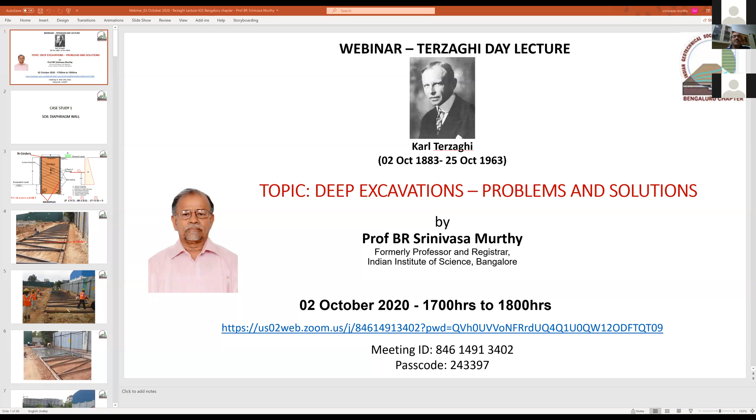Professor B.R. Srinivas Murthy graduated in civil engineering from Mysore, and then he obtained his master's degree in soil mechanics from IIT Bombay in 1968. For a short period, he was an SRF under a CSIR scheme at IIT Delhi. Then he served as lecturer in civil engineering at SIT Tumkur during 1969-70. Then he joined PWD as junior engineer and served 2.5 years designing major irrigation project structures. He spent a short period of 8 months as assistant design engineer with MECON in Bhilai, designing steel plant structures.

His passion for teaching brought him back to academics and he joined University Visvesvaraya College of Engineering of Bangalore University as lecturer in 1973, then became reader in 1981. He obtained his PhD from Indian Institute of Science, Bangalore in 1983, for which his thesis was awarded the Professor G.A. Leonards Award of IGS and the Professor P.S. Narayana Medal of IISc. In 1984, he joined Indian Institute of Science, Bangalore, and became professor in 1998.

He served as registrar of Indian Institute of Science for 3 years, and he superannuated from Indian Institute of Science in 2005. In over 2 decades of his service as professor at Indian Institute of Science, he guided 14 PhDs and 7 MSc engineering theses, in addition to scores of ME dissertations. I am also one of his MSc engineering students guided by him. He has published over 100 technical papers in international journals and conferences. He has also co-authored a book titled Analysis and Prediction of Soil Behavior with Professor T.S. Nagaraj and Dr. A. Vatsala.

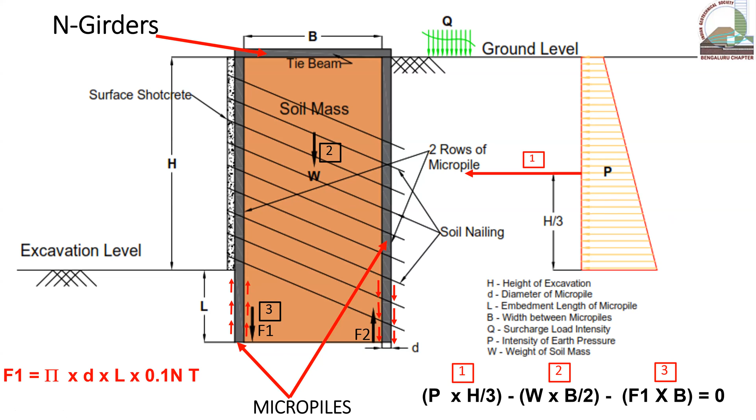Now I'll give you the details of that. Anybody can generate this mechanics-wise. There are 2 rows of micropiles, 1 row along this line and another row along this line. This is my excavation line, virtually the rear face of the retaining wall. Again, the retaining wall for 14 meters is not 500 thick or 600 thick. It's only 200 or 250 thick because earth pressure will not be there. I'll show you that later.

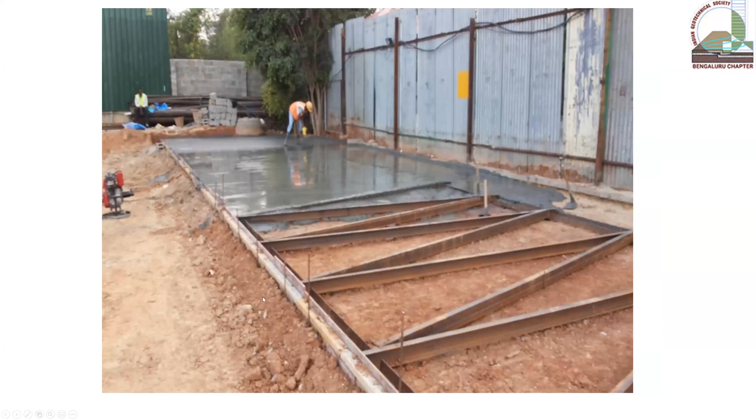So then you can see. And there is a capping beam here. What is this micropile? When I open it further, you'll know. Between these two, I introduce a girder so that the stability is ensured and the whole thing acts as a mass. Now I start working on this. We provide concrete on this, like this. About 200 mm thickness of concrete is laid all along this, so that even the construction vehicle can come on this. That's what we did here.

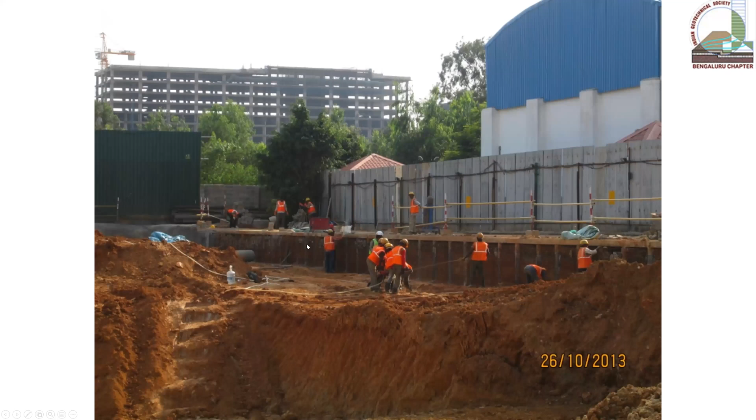You can see now. And then we go incremental excavation, not sudden excavation. Everything is done by incremental excavation. And then we drive the soil nails. For these soil nails, this is Honeywell property. It will not go beyond our barricade line here. So only about 4 meters or 4.5 meters was the available length. We drove that, you can see now. Once we drive that, we fasten weld mesh and then we put the shotcrete on that and continue the steps.

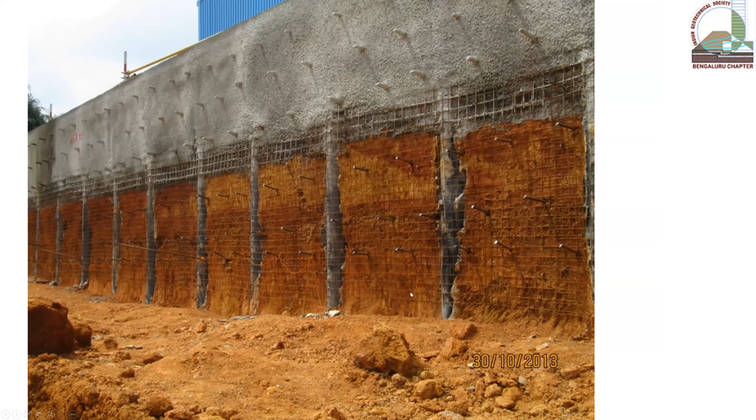But once I go up to a certain depth of 3.5 meters, I may have to provide additional stability for the micropiles. You can see them here. This we call snug fit and welding. This will be cut to the shape available here and then welded in between them.

You can notice one more thing here. The weld mesh shall never be welded to the micropile or to the nails. It shall be fastened. On the top of that, I have got a small MS strip, and that is welded to the micropile. Or I can have a crossbar. That crossbar is placed outside the weld mesh, and it is welded to the nails or to the micropile. That's how one has to do it.

And again, you can see the groove here. This groove has been cut here in the soil to embed the whaler beam, or whatever beam you want to call it, a lateral support. It's snug fit and welded. Snug fit means it is cut to the shape here, and it is welded from here when I am at that level. I can keep on going like this.

Then you can see this one. This is another one. Same project. Next, you can see together. This is the next level.

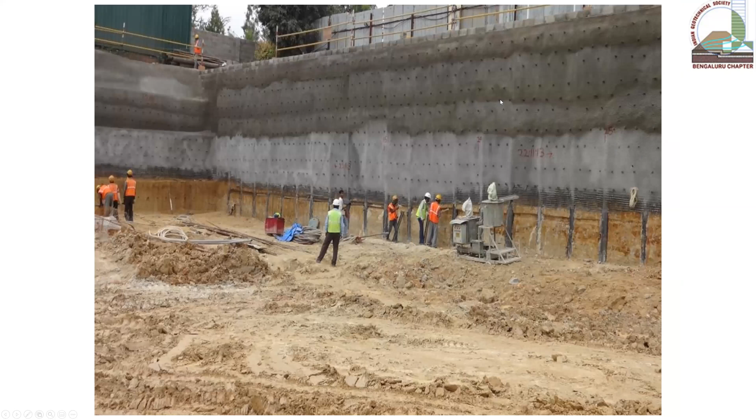So you can see the snug fit and welded whaler beams have been provided here, and this is coming here, maybe going to one more level. That is absolutely required to maintain the stability of the front line of the micropiles, whereas the rear side is already embedded fully, so there's no problem for us.

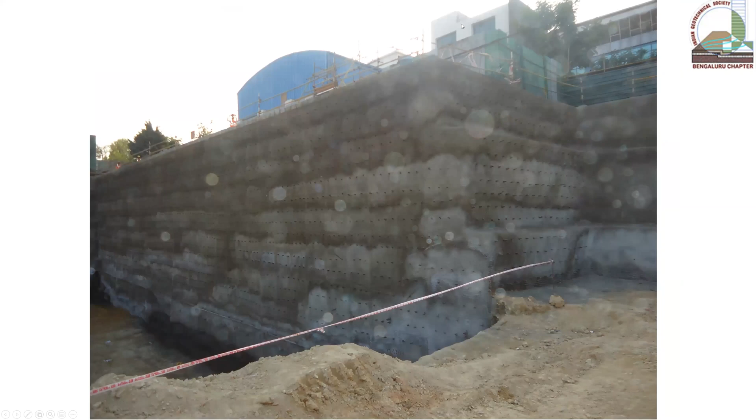And here again, we have done it in the cross direction. You can see now, this is how it comes here. We have gone up to the full depth here, you can see. This is standing on its own. Why should I design a retaining wall for earth pressure? There was a major difference of opinion with the structural engineers who are supporting RMZ and L&W. Then they came back and said, yes, sir, we agree. That is the reason why the wall here is not a retaining wall, it's a basement wall. It doesn't retain anything because this is standing on its own.

And when we cannot drive the bar, this is the point. Driven bars have got a limitation that they can take more time to drive. Then I go for one row of grouted nails or two rows of grouted nails depending on the situation. Here the total depth was 14 meters. We introduced grouted nails here, 2 rows.

These grouted nails have one problem: I have got this whaler beam projected out. It will be embedded inside the concrete. That is the reason why we went for another 50 mm extra thickness up to here, and beyond that, above that, it's only 200 mm thickness. So that is a beautiful work.

In fact, our Basavaraj from the structural engineering group said, sir, you have converted the soil into a structural element. It is something different. Yes, I agree with it. Together it's working. Even in Nepal we are doing it, in Sri Lanka we did, many places we have done that. I hope that you can.

In fact, one gentleman asked me, sir, have you patented this? Sorry, I will not patent anything because my institute founder, Jamshedji Tata, has written a will that the research outcome from this institute shall be in the public domain. That is the reason why I have not patented anything, though I had many chances to make patents. I will not be doing that. Thank you very much for that.

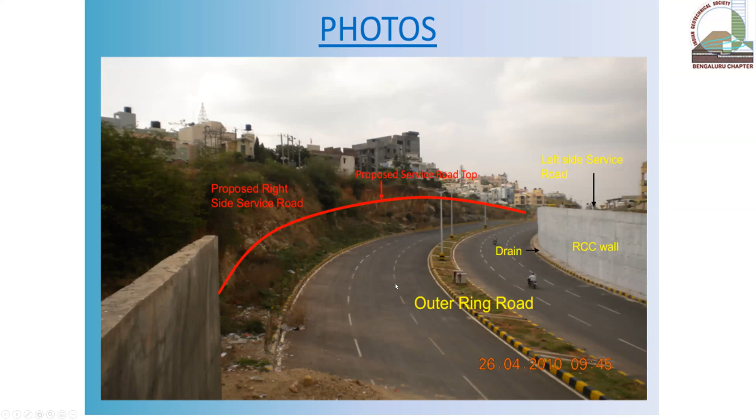Then what is the space available? Sir, there are a lot of multi-story buildings above here, they started telling. So I went around. Then what we did, you can see here. This is again in 2012, I signed this. That was 2010 end, this is 2012. After 1.5 years of discussion, in the existing ground, I put the grouted nails.

And for tension here, we may use steel, but they preferred precast elements so that it looks elegant. They didn't want a blank wall. Therefore, we went for the RE wall panels here. And these RE wall panels are interconnected to these grouted nails with the TerraLink. TerraLink is a polypropylene material which can take enough tension. You can see that.

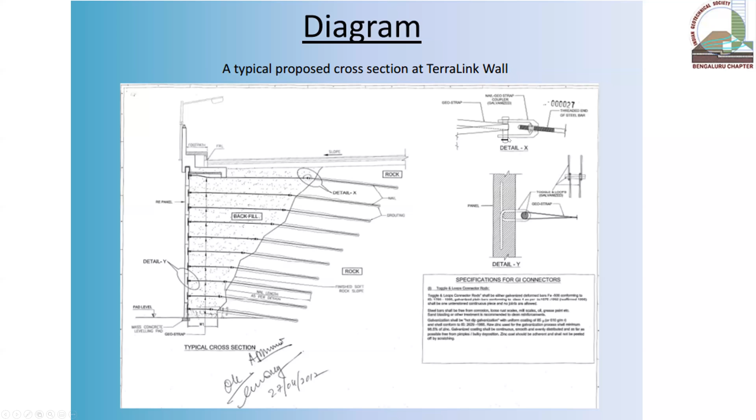So layer by layer, we can do this. Fortunately, TerraLink is available with different strengths, right from 4 tons, 6 tons, 8 tons, like that, the tensile capacity of that. So we can have capacity here based on the number of layers we put here. And in fact, this is a turnbuckle system, where for the rod here I have made this turning, and then this link here; you can see it more clearly in the photos.

And this is how drilling is done. It is not that everywhere I am getting rock. You may get soil somewhere there. And again, the link. You can see the drilling, how difficult it is. You can see the building, how close it is. We have got hardly about 9 meters above to make the road.

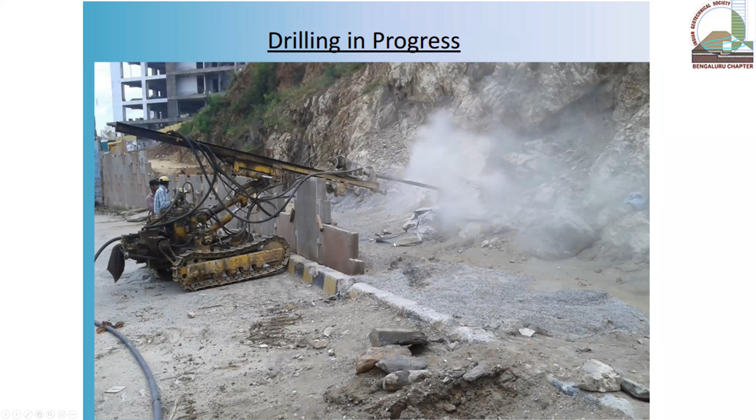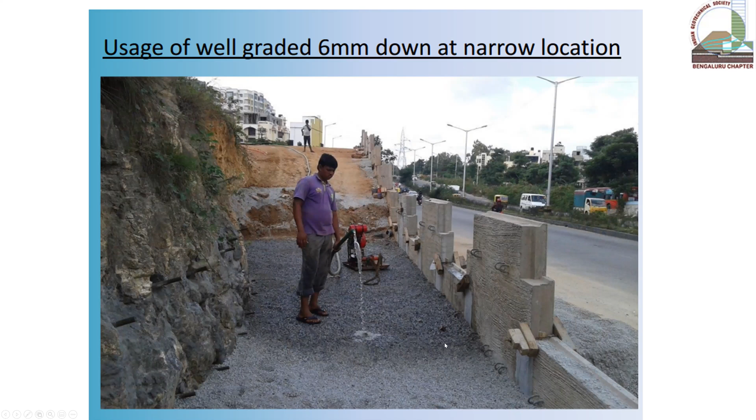So then we use the precast slabs here. You can see here, RE panels. These RE panels have been brought here with a small foundation, and then backfilling with a proper material. For this, we prefer it risk-free. It shall be self-draining, everything like that. That's why we went for a granular material.

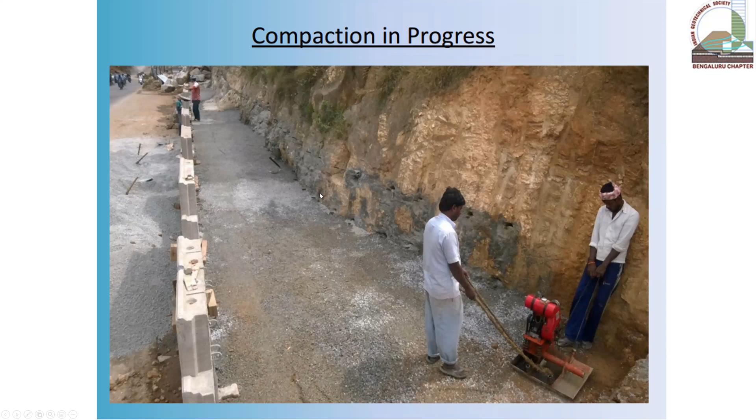Okay, you can see now how it's compacted. You can see before that itself we have drilled here. These are all grouted nails. At this level we do this, and then when I go up to here, then again do it. You can see the nail layer.

Then how we link this, you can see here. This is what I said, the bar from inside has got a threaded system. I get a turnbuckle here, and I take the Terra tape here, round this, and can you believe that this can come even to 100 meters length, 160 meters length. We go by this and wind it here like this.

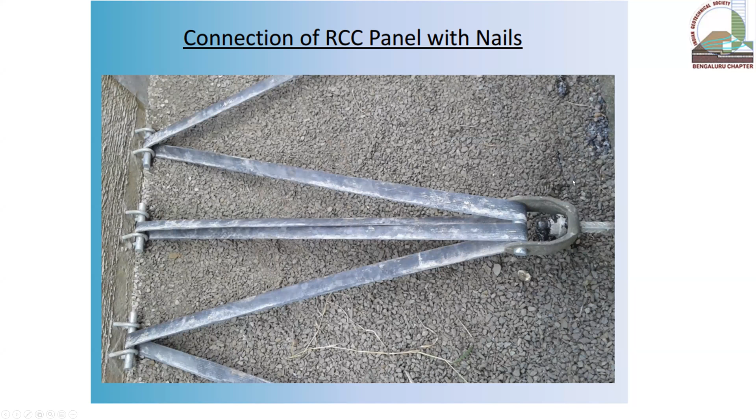And this is the precast element. On the back of that, we have introduced a rebar. This is a galvanized bar, so that it doesn't corrode. And these are the hooks which have been embedded into that, and then it holds it. You can see now, this is the panel. At each level, we are doing that. You can see. Going. Again, layering above.

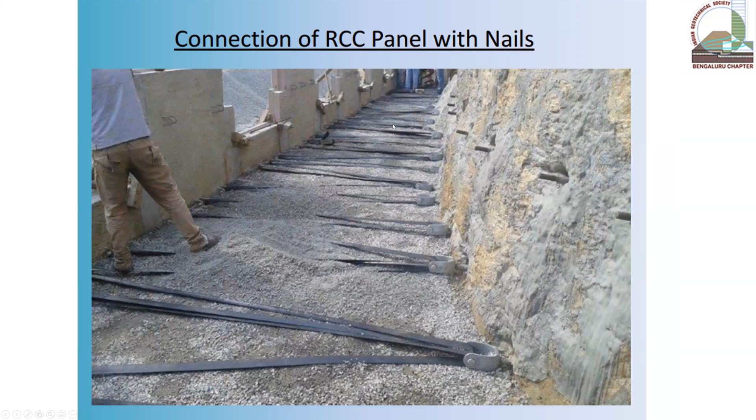One more view of that. Another view. You can see how bad it is. There you see a hard rock. Here you may see soft rock. You may see something very bad also.

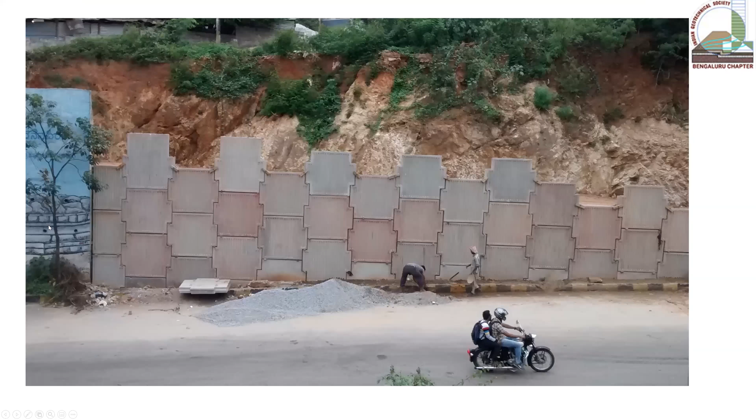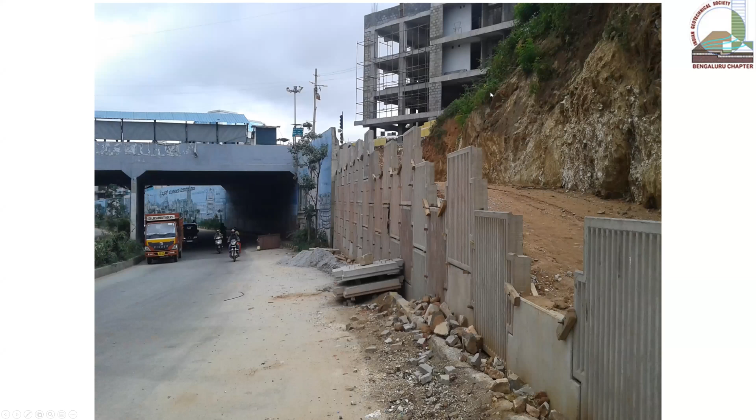And this is how you can see the panel is interconnected with the return wall of the underpass on that side. This is the underpass which is coming from the outer ring road, and next to that we are building it. And above this, you can see the buildings which have come up there. You can see the panels are sitting. You can see now much more.

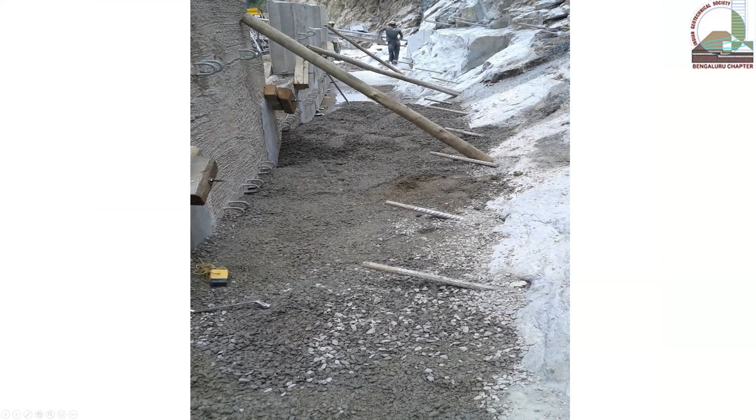And more additional drilling. These are all additional photos showing how bad the site situation is, everywhere. It is about 600 meters length, not 1 or 2 meters. And when we do this, we may find many problems, hard rock here, maybe soft here, something else here. We should be ready for all that.

If I find it soft, for example, if the drilling time taken is 3 minutes per meter, I may use one parameter. If it takes 8 minutes per meter, I may use another parameter for the friction. If it takes 20 minutes per meter, then I may use something else. This is why field engineering is required. And this we did successfully.

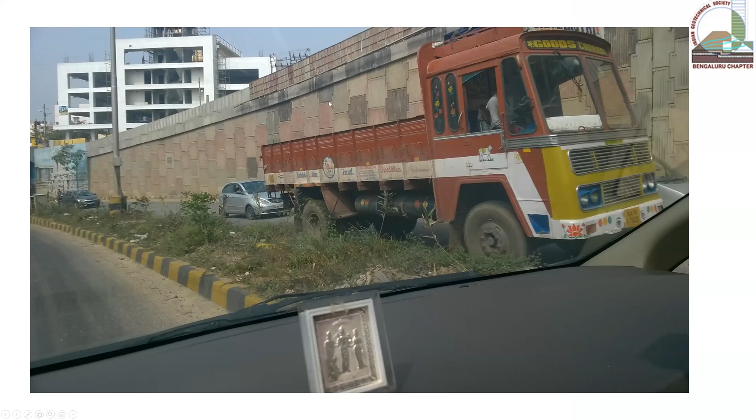You can see the top crash barrier. This is the portion. On that side, we get our thing. You can see the road coming that side. Height, you can see 6 elements, 5 elements. That means it has gone up to 10 meters height. You can see one more view.

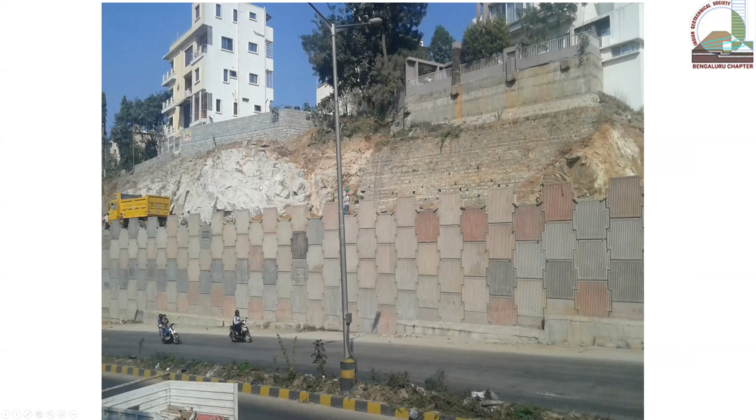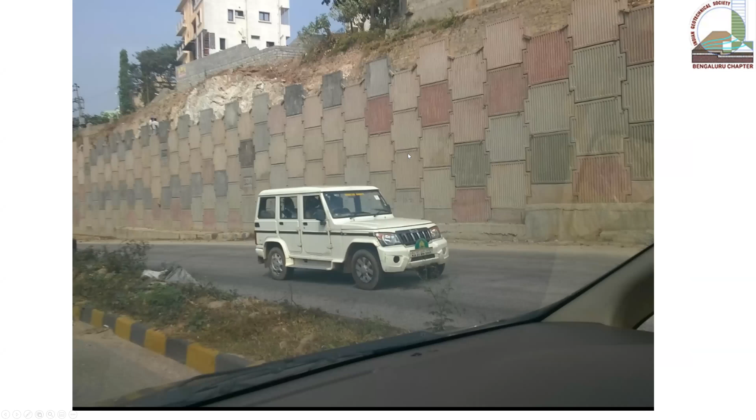This is a blasted rock, and here stone masonry work has been done. Their house has got an entry from that side here, and still we have to work without disturbing the house. Fortunately, we were successful. And can you see here, we have removed the stone, and then we have introduced the grouted nails, anchors, and finally the wall height will come up to here. Okay, you can see that. These crash barriers are being constructed at the top, which covers the top.

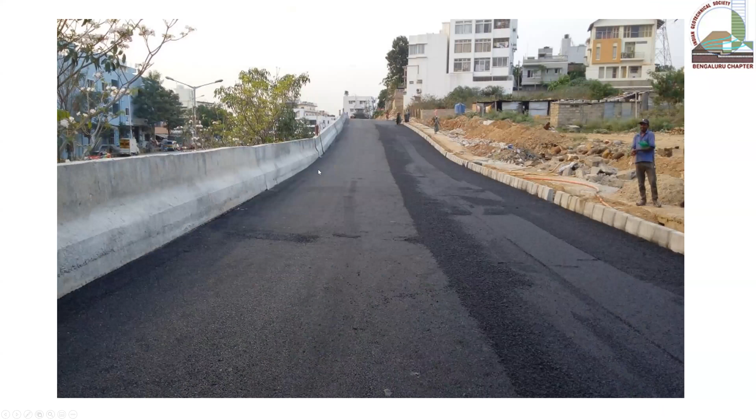You can see after that blacktopping. This is the width of the service road, which is 7.5 plus something, because minimum is 2 lane. And then we have got the footpath here. You can see another view of that.

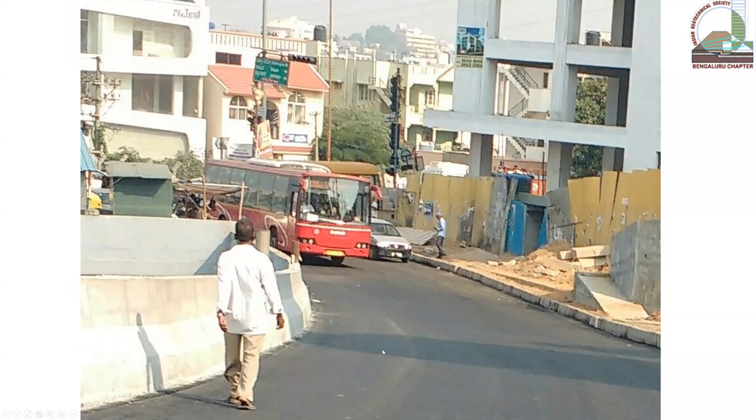So why I said is, generally, theoretically, we can't sit in the laboratory, I mean, classroom and think about what should be the solution elsewhere. Unless the field people pose the problem to us, nothing can come. Honestly, I have learned everything only from the field people, not from the textbooks.

What I studied in engineering is different, master's degree is different, and what I did is something else. But subsequently, everything in life I have learned only from the field engineers and solved their problems. That's the point. This is a very important work.

You should see that. Tata Housing has got 3 major towers in the southern part of Bangalore. That's Banashankari, the Promont site. There was a major issue. This is the lowest level of the site. And I had to construct a road here of 7.5 meters width, and height varies from about 3 meters to 8 meters.

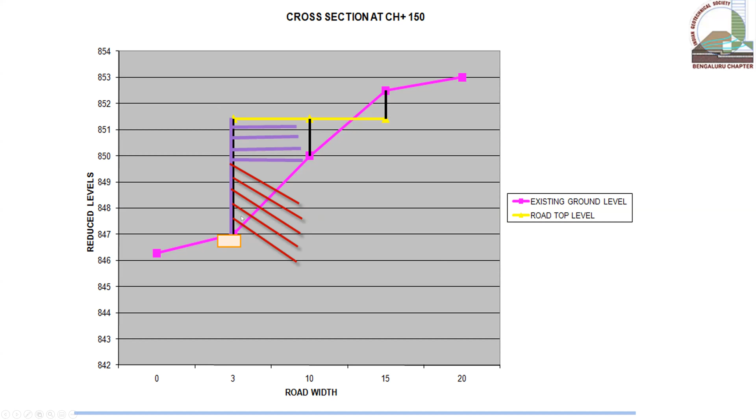Okay, then I said, can you believe that this is only about 300 by 300 foundation? And this is only 150 thick RCC wall. You can see better later. And we are drilling through this system. The top of the hillock is something like 300 to 400 feet above this level, and we go gradually sloping up.

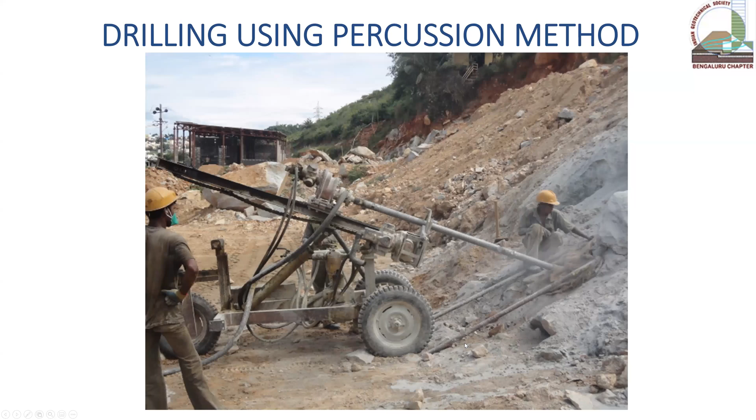These are the grouted nails drilled and anchored here. Bars have been grouted here. Many of you may not be aware what that grout is. Generally, it's a pure cement slurry with non-shrink grout compound. Water cement ratio is 0.45. With that, we should grout it under a pressure of 1 to 1.5 bar, not less than that.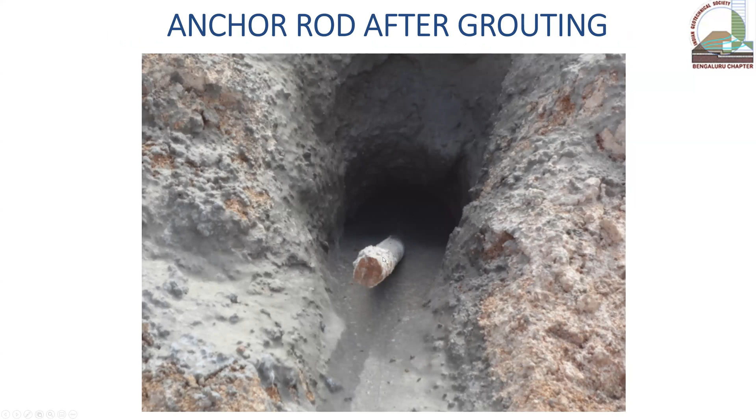It shall always be tremie type, from bottom up, not simply pouring. Some people were doing it only with gradual gravity flow. No, it's not right. Can you see here? On the surface, we have installed the grouted nails.

The time taken for each one to drill, based on that only I design, because I don't know how the pull-out capacity varies from point to point. So based on how much time it has taken, we have recorded it. And then you can see the cement slurry, which has flown after completely grouting up to the top level. It flows here.

It's a method. You can see the rock cutting here. All such things are available at site. It's not simply a pure isotropic homogeneous material for us. We have to deal with the natural soil as it is.

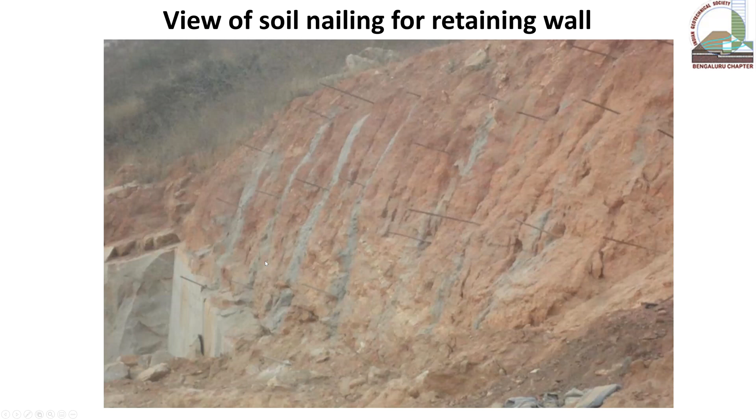Now we can see, this is about 300 by 300 foundation, and then you can see the 150 mm wall thickness, but this is the reinforcement, again nominal. I don't prefer anything, but it can be designed for the tension, whatever is available. And here, this side, we are going with the road up to this level height.

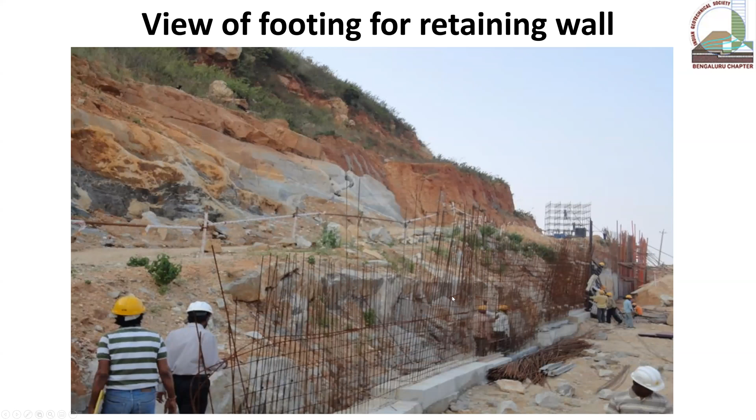I think this goes up to that. And here, gradually going up. Here, the height is less. As I go up, it goes on increasing up to here, and then takes a turn here. We have done something different there marvelously. Let's see. Then you can see this is the excavation, or the drilling, being done there.

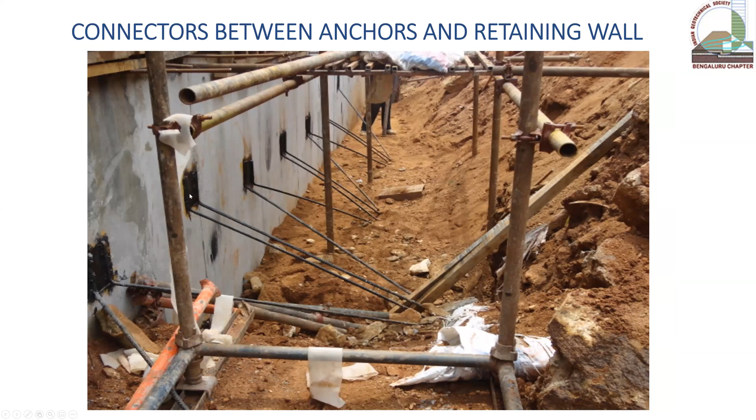Then you can see the drilled grouted nails here. Can you see the bars here? These bars are to be connected to this. So first we put this and then put the concrete, and then the wall is ready. Then we embed a plate here. This plate has been connected to this by welding. This is the first project that we did like this. Therefore, we welded it like this.

And subsequently, I'll show you the improvement that we have done. You can see that depending on the capacity, it is linked to one place or 2 places or 3 places. If the strength of the grouted nail is quite high, say it is 40 tons, then I may require only 30 tons or 20 tons here. The remaining 10 tons has been shared to this. This is how we have redistributed the entire thing based on the data that we had.

The data is based on the time taken for drilling, the time taken for getting up to the bottom level, and what is the length of that. Based on that, I calculate the frictional resistance. The simplest calculation of frictional resistance is 1 N equal to 0.1 ton per square meter. So if the N is 40, 50, 60, based on that, I get it. Or if it is rock, I have got a methodology for that. In fact, your literature is wonderfully focused on that. We can go for that and we can do that.

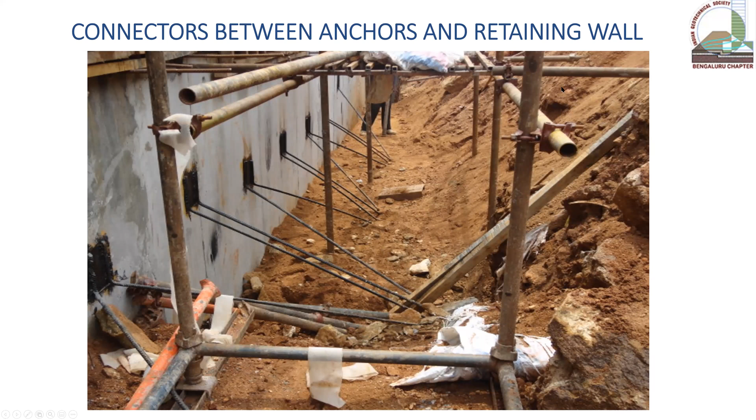So, connectors between the anchors and retaining wall. You can see some more. People asked me in the beginning, why did you scatter so much? Because this has got one strength of the anchor, whereas the next one may be something else, and the following one something else. But I may require uniformly distributed pressure on this, and then I have to counter it. Therefore, I am giving a number of things here. From here, maybe 4. From here, maybe 3. Somewhere here, maybe only 2. That depends on the strength that I have got in the grouted nail.

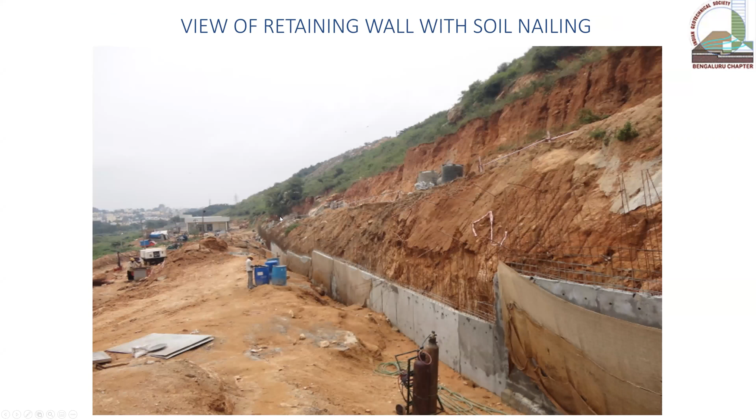This is a very different concept which we did. And I can see that from that side. This is the road level. Ultimately, we go up to there. This is the road level; it is also sloping ground. I have to reach the top level. So this road is going up like this and turns here. So we have to build this wall up to this height. Can you see the height? This is the thickness, 150 mm. And you can see the reinforcement, everything.

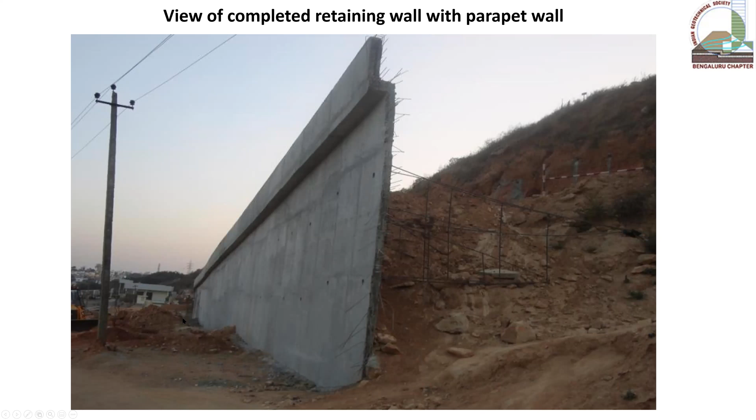And structural design has been done by our Chetana consultant. They helped us in concrete optimization, there's no doubt in that, Mr. Swaraj. And this is the turning point. After this, what we did, I'll show you. This wall stops here, but after this, we didn't do the wall. Another point, sometime later I'll show you: the neighbor has built a tower here later, very close to this. If we had not done that, it would have been a tough job. You can see the parapet has come here, and weep holes have been given. No compromises have been made there.

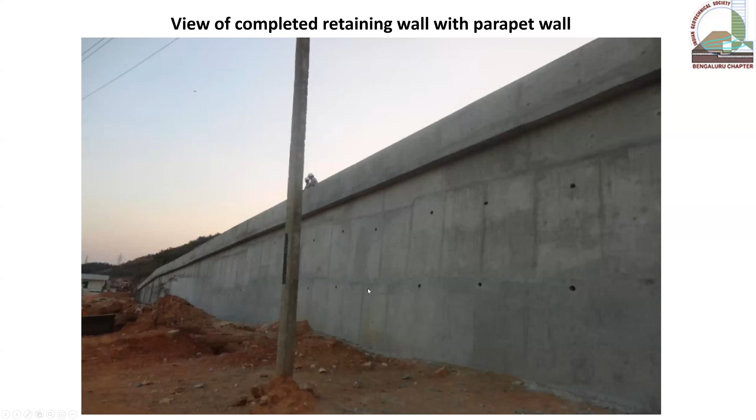And actually, before this, I had done this also in one place. This is called an anchor wall for a resort in Kodaikanal. What is that anchor wall? Why they required it? They didn't have the parking place for such a huge resort where more than 100 cars will come and park. So they approached me. Then I got a good friend in Chennai, and I told him this can be done like this. Immediately he said, sir, I'll try everything.

Can you see here? Instead of plate and welding, we have fixed here ISMC. And on the bar here from the grouted nail, instead of a turnbuckle or other things, I have put a channel ISMC piece that has been welded here and welded here. This is how things can be done and improved. Here you can see now.

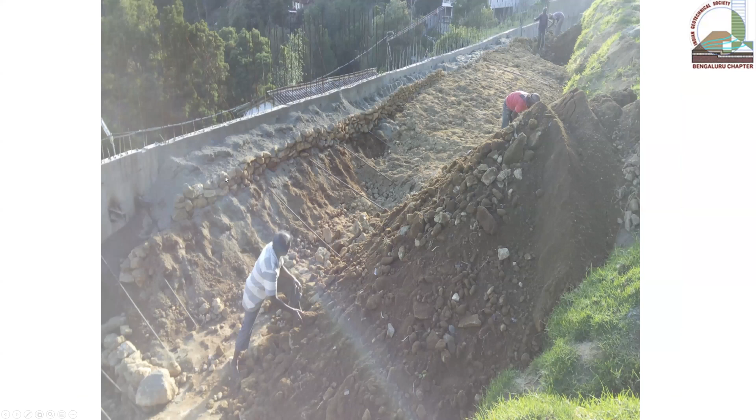And for backfilling, they had a lot of excavated material itself, rocky material. You can see it has been dumped. And to make the drainage system here behind this, we stacked it here like this. You can see the aggregate of the rock mass has been stacked, and behind that I put the filter material. And this has been compacted properly. You can see one more view of that.

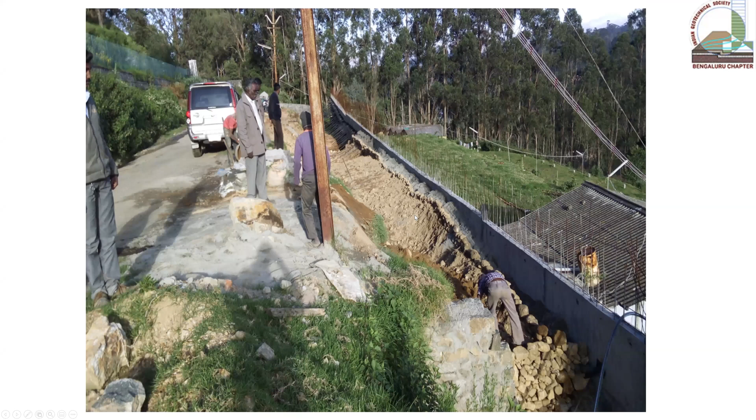You can see the height. It goes up. Can you see the marble? This is almost a kilometer length. You can see the building on the other side. There is a building already. Below that I'm doing this without endangering any of these things.

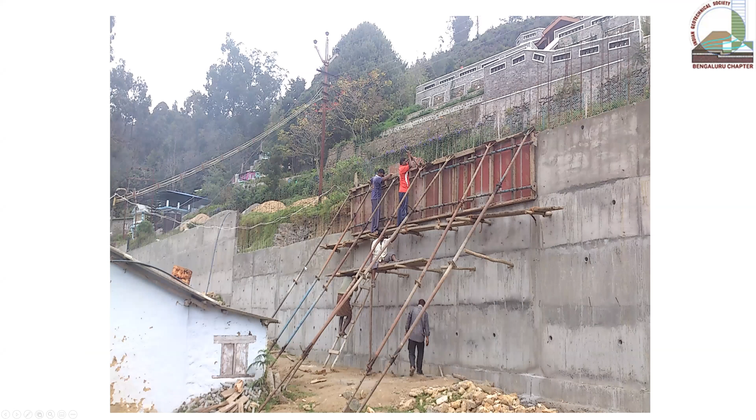This is what I said. This is the channel that I embedded, welded to the rear side of the retaining wall. And then the grouted nail bar comes and welds against this. I don't need to bend it. For example, in this case I was bending here, but now I don't need to bend it. It has been welded here without cutting, because bending is always a dangerous thing for a tor steel bar, particularly after welding.

So that is how we have done it in Kodaikanal, and it's now more than 15 years, absolutely performing normally. At the resort, people are parking the car from there to here.

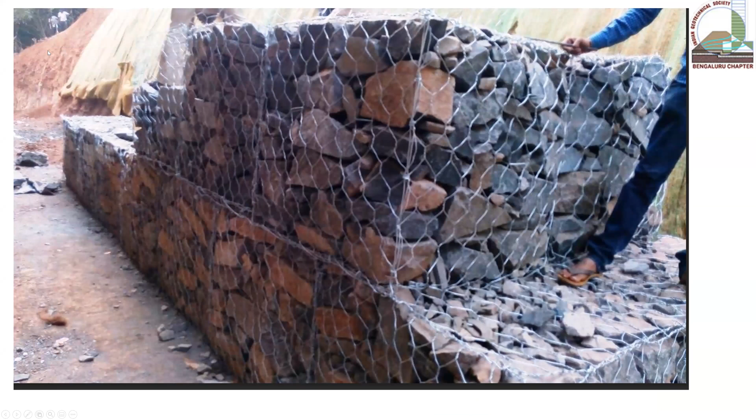And this side I have got the flats here. This has come up to the apartments, housing units of the resort. So then what we did is we went for a gabion wall with available rock. These are the gabions which have been placed here. The method we adopted is a gravity system, no anchoring.

We put geotextile filter cloth on the soil on the rear side, which can serve as a filter material, so that the soil will not migrate from the slope into the gabion. And below that also we have provided a geotextile filter cloth filter layer. Then you can see now how it goes along this soil surface.

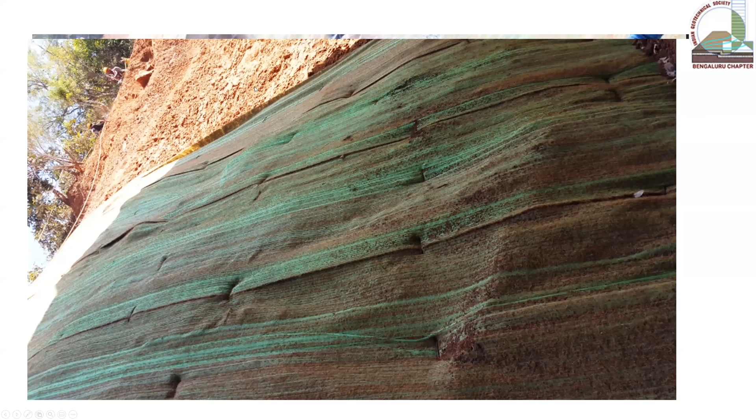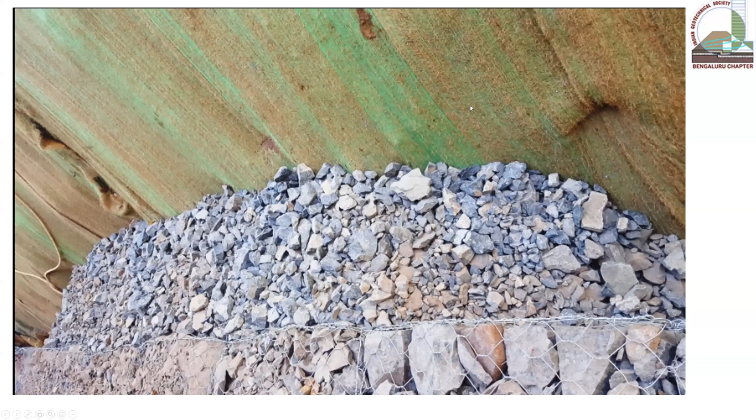It is actually a forest type. It had fallen up to here fully, we trimmed it, and then we started putting the geotextile filter cloth on the surface. And then you can see the gabion. The gap between the gabion and the geotextile filter cloth we filled up with aggregates, with rock fill.

Then the next layer of gabion will come and sit on this. It goes up again. As I progress up, the rear side thickness also reduces along the slope of the existing system. This is how it should go up. You can see here some more views of that. And we used the available rock fill in the local area.

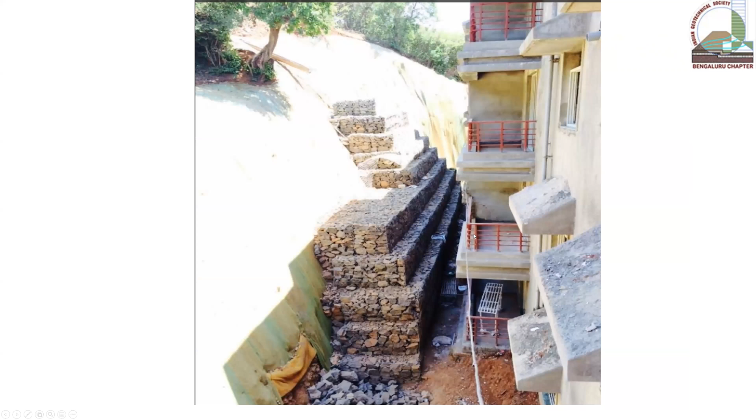You can see here these are the housing units, ground, first, second. And there was a major issue of this entire thing collapsing here. It had blocked the ground floor completely. We started working on that. We have given the gabion protection, and it goes up to the top here, 2 floor heights, you can see.

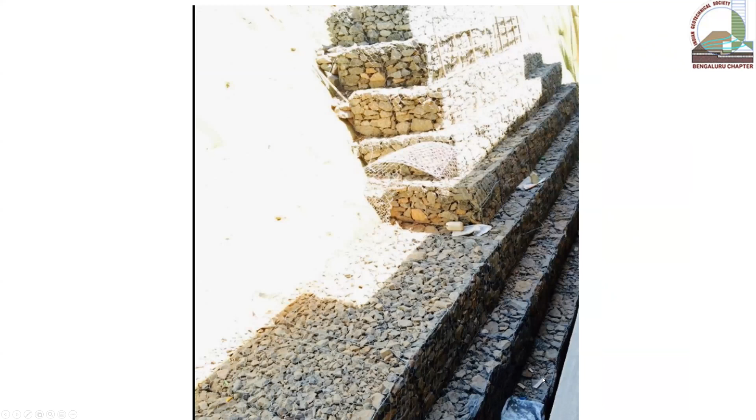In some places where I get more space, I give offsets in the front, and the rear side I fill up with rock fill only, so that I will not waste my material. So it's only one layer of about 1.5 meters or 2 meters thickness. Height is 1 meter, length could be about 3 meters. The rear side is filled with aggregate and then we continue. This is the line where it goes.

You can see one more view of that. Almost 8 meters, 9 meters, some places 6 meters high. And it's more than 10 years now, standing on its own and fine. One beauty is, whatever rain water enters goes through this, because it's filtered, and comes here, and we have made a French drain below this level at the edge. That automatically flows out, and there's no problem at all. No choking so far.

This is a very interesting project here in Bangalore, near Dayanand Sagar College; you go straight from there westwards. There is one ISKCON project on the hilltop. This is a prayer hall, and there is a kitchen. The entire land behind this is BBMP land, but it collapsed because of the rain, and they had a major issue at that time.

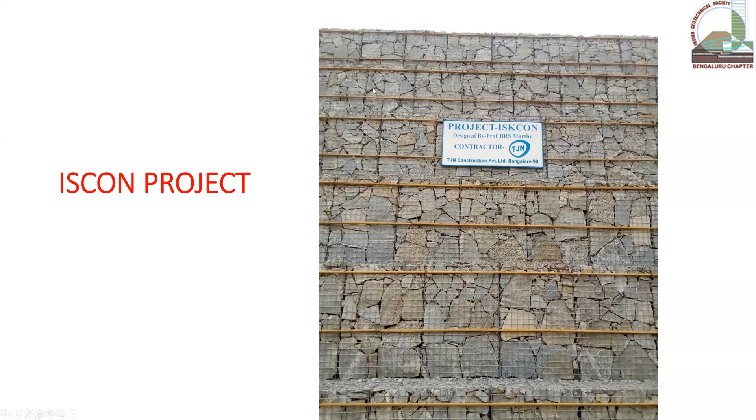So we did this. You can see here. This is above, and below that is the BBMP land. In between, from here to here, is BBMP land.

But they did not permit us to use anything, because they said no, we can't use this. Can you see the geotextile filter cloth on the rear side? Same principle as I said there. From here, we spread the geotextile filter cloth and then go on that, and the gabion is put here.

Can you see these lines? These have been put only to preserve the straight line, so that if something is projecting, we should know, and we have followed every principle of gabion, where the vertical joints are to be broken. There are some places where we can't do that. I'll show you later. See, this is how we have done it in a very systematic way.

And it's also gravity. In some places, we have gone for some grouted anchors, but BBMP said no. Therefore, we have managed to get the rock fill from there to here, which is capable of withstanding on its own. So this is how it was done. This is perhaps the last part of the discussion, I can say that.

Can you see, this is the hilltop where we went down through the road we formed, and we stopped the RCC wall there in the Tata housing. But further going up is a difficult task. There's nothing like collapsing here. So we need to protect our own slope because here 20-story, 18-story buildings are coming up on the top.

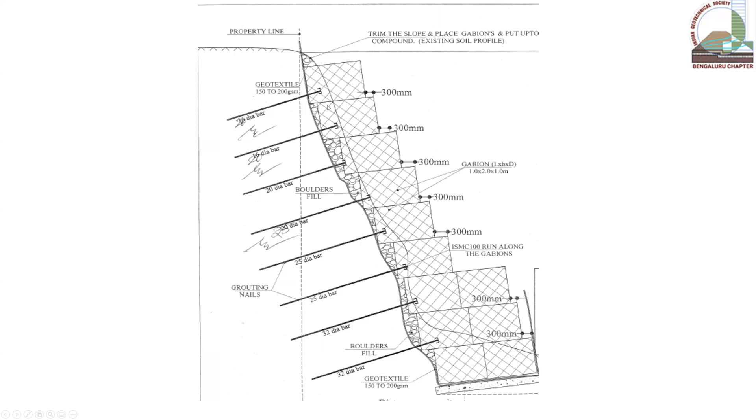Majority of the time we bring the gabion filled readily and then place it. Here it is not possible. We have to fill up here. This side you can do anything, I don't mind. And this has got a small slope so that it reverses and balances with this. You can see that. And here it goes up like this. Perhaps if you see the photos, you'll see better.

Here one problem was there. I told you that these joints are to be broken, horizontal and vertical. But the vertical joint has not been broken here. But the fortunate thing is these are all anchored. If it is gravity by itself standing, then I have to break this. That's what we did in the other case. You can see that. So this is very crucial design detailing.

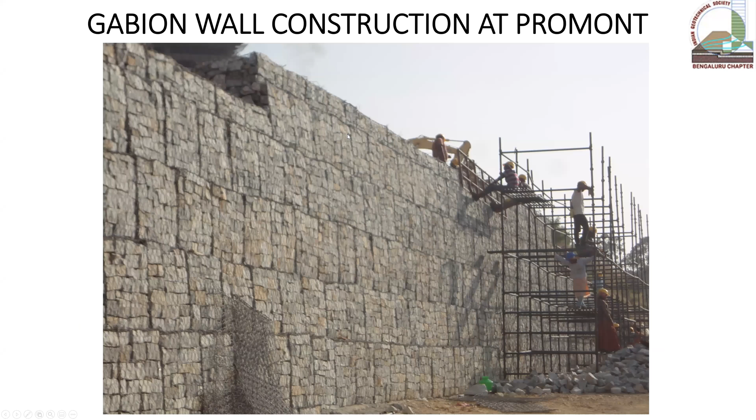You can see each one is almost 1.2 meters height and goes up like this. You can see some places it's almost 14 meters height. 8 to 10 meters is average. And the gabion has been used completely. We consumed all the 3,000 cubic meters of rock that was removed from there.

Can you see the tower here? These are the towers. And here you can see the level, the basement level is here, the roof level is here. And somewhere here the height will be more because this is sloping down. This is a hill ridge sloping down in three directions. So this is what we could achieve there. You can see the construction detailing.

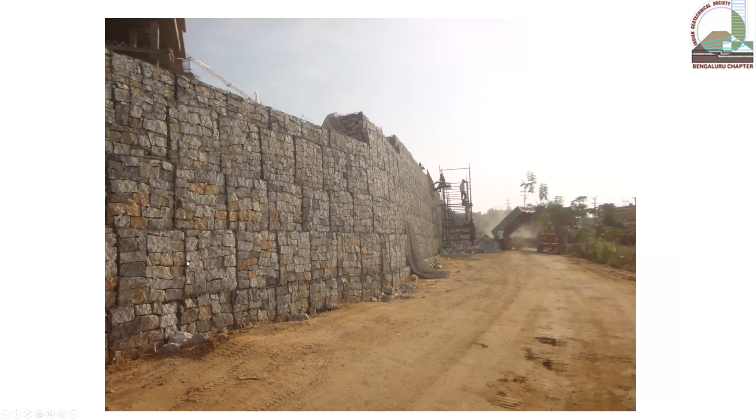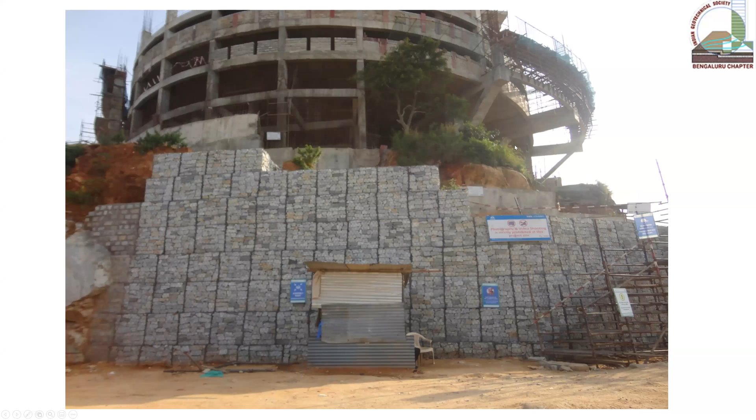But one thing I was not happy with: Maccaferri did not do that job properly. They should have broken this also. But the fortunate thing was it is an anchored one, therefore I'm happy and safe. And so far no damage has taken place for the last 8 to 10 years. See, this is a circular building. You can see one more of the same Tatas.

Okay, that's it, fine. Yeah, that's what I was referring to. This is our RCC wall that we have built from there to here. This is a circle turning. It goes further where this is the tower, down below, in front of our RCC wall, they are building towers after towers.

This entire area will not be as we saw in the beginning. Now it has come up very well and it's going up well. You can see one more. We have that.